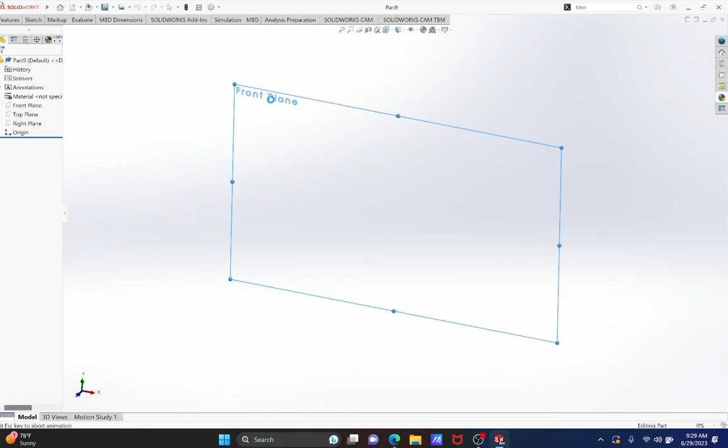Okay, so first thing we do is go to File, create a new part, press OK. I'm gonna go to Sketch, select the plane that you wanna put this sketch on. So I'm gonna grab rectangle, place it in there, and this top line is going to be 7 inches. This one here is going to be 5 inches.

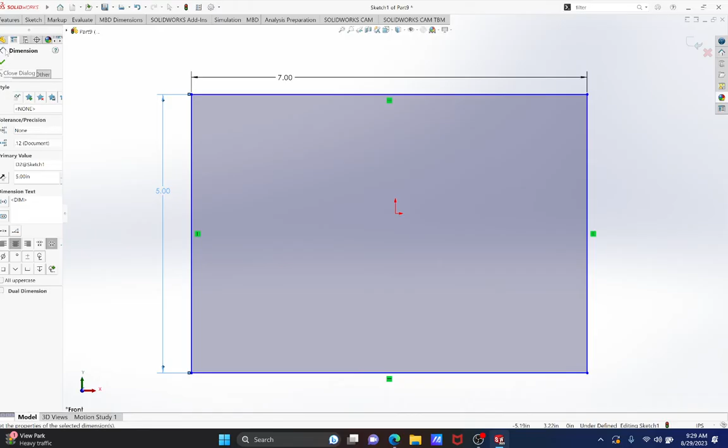All right. And I wanna extrude this. I go to Features, Extruded Boss, and I wanna extrude this by 5 in there. Next, go to Sketch again. Sketch, select the face where you wanna put the next one. I wanna put a rectangle in there. I'm gonna put it right at this corner. Bring it down.

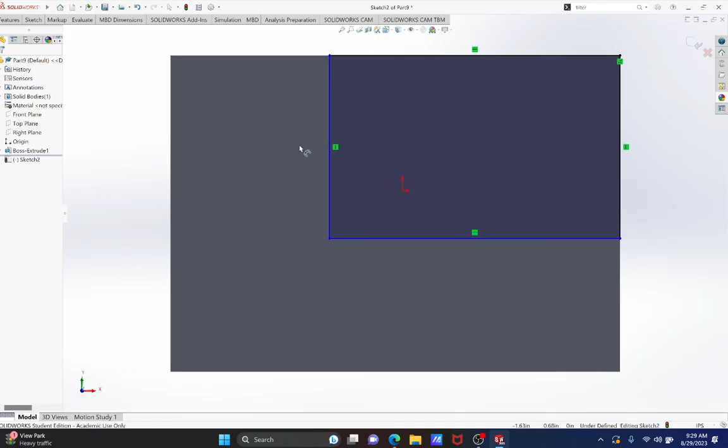And I actually want this to be 3 by 5. So 3 inches by 5 inches. And I'm gonna go back to features and I wanna cut this entire thing, which it does. Okay, check mark.

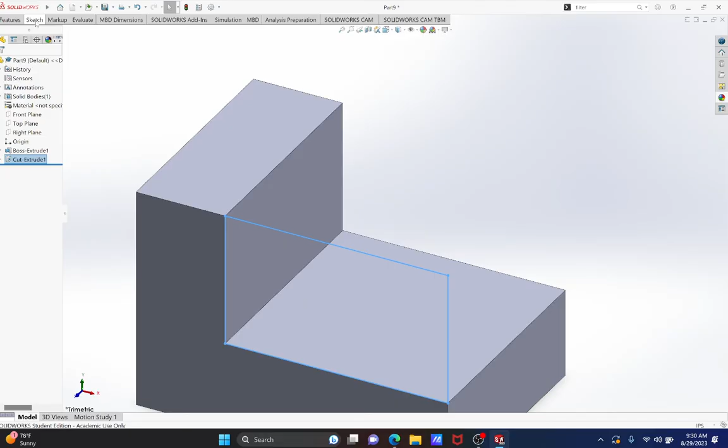Now I wanna put this rectangle in there, which is the 3 by 1. So I'm gonna go to sketch, select the face where you wanna put it. Go back to sketch, select rectangle, put it right at the edge, and then again go back and grab your dimensions. This here is going to be 3 inches, and this is going to be 1.

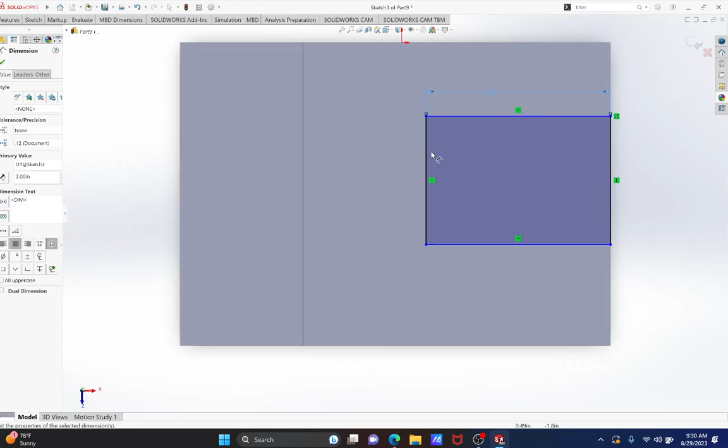I do want this to be 2 inches away from here, just because the entire thing is 5. I'm gonna go back to features and actually want to cut this guy. Okay, so that one's done.

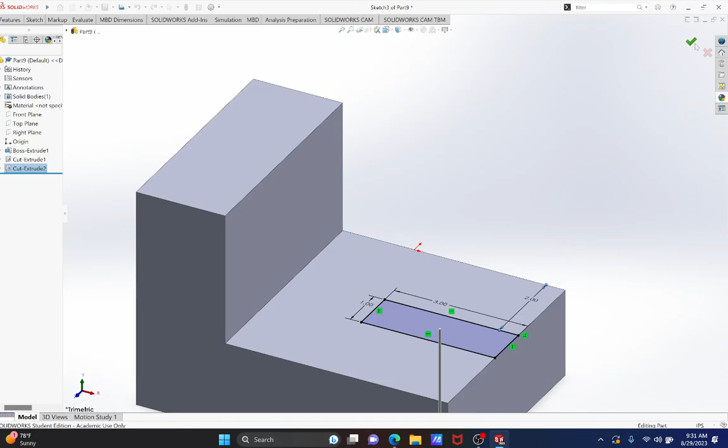Now I'm gonna go into this section here. I'm gonna go to sketch, select this face, sketch. Make sure you grab the rectangle in there. Go back and grab the dimensions in there. And this is 1 inch by 3 inches.

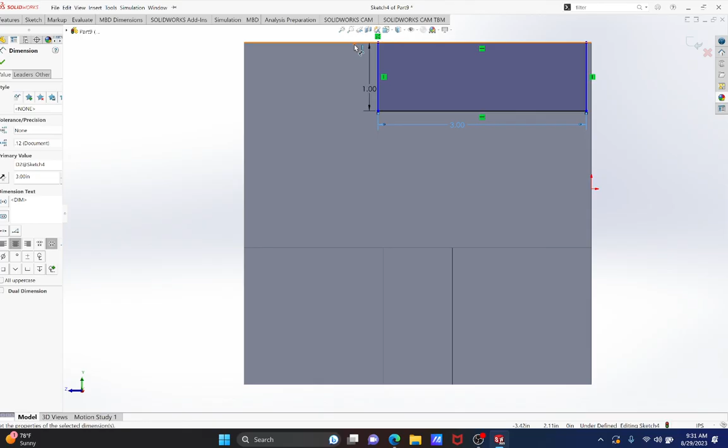And I actually want this to be 1 inch away from this spot right there. So select those 2 lines. Go back to features and then cut it. So extrude the cut. And that's the end of this one. So you should get this final product right there. Okay.